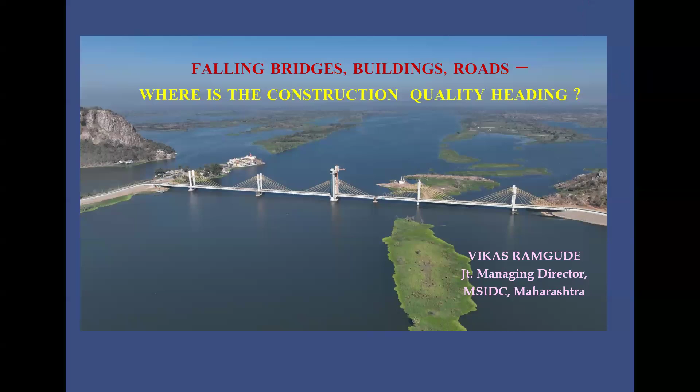Here you can see we have very marvelous structures. Even in the past we have the Taj Mahal and so many beautiful bridges, which have survived for 200, 250 years. The basic difference between today's era and old structures is that most old structures were in masonry or concrete, mostly using the arch form for construction. Environmental pollution was less, so there were lesser durability issues. Traffic was less, axle loads were less, and because of compression there was no cracking, resulting in higher durability. So today people say those bridges have survived for 300 years or more.

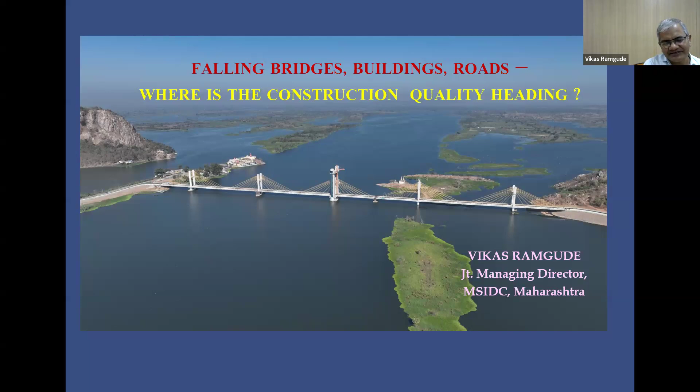What has happened to modern era bridges? Today everything is total hurry - what should be done tomorrow is done today, and what was meant for the day after is rushed into today. That was the speed, and during the last 10-15 years the speed has enormously increased. Infrastructure projects have also increased, but the competent personnel to handle that increased workload has not increased in proportion. That is one of the issues, and it's a very common thing.

Yours is a quality forum, so quality is the ability to fulfill the function. What Ruskin said in a right way is that quality is never an accident - it is always the result of high intention. So there must be will, there must be sincere efforts, and there must be intelligent direction.

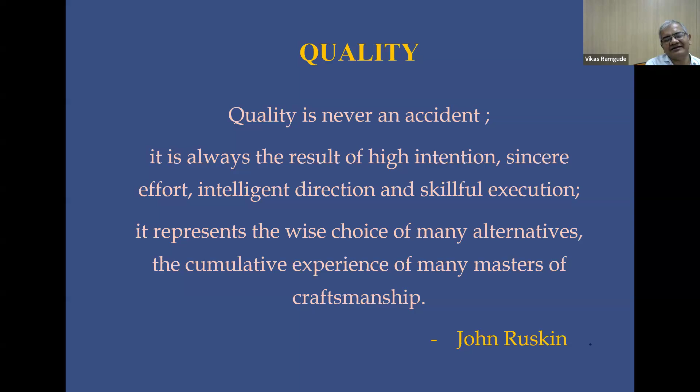And again, skillful execution - there is a supervisory part and there is the actual execution part. There is planning, supervisory design, but the literally skillful part comes from skilled laborers. That is again missing in today's scenario. Ruskin further said it represents the wise choice of many alternatives and the cumulative experience of many masters of craftsmanship. So here he defines the necessity of good builder, good material, good machineries, good intention, good training, and skills, guided by experienced personnel.

I am showing this picture of a bridge in Maharashtra which has completed more than 450 years. It's a single lane bridge, and still it is sustaining the traffic. It has just been repaired nearly 2 times, but not strengthened - only because of the compression form, lime mortar, and light traffic, it survived for more than 450 years.

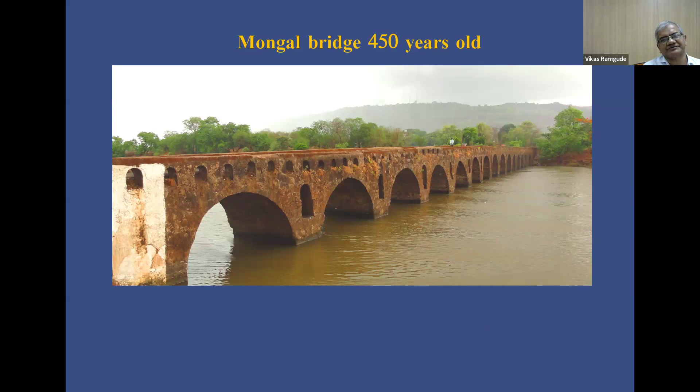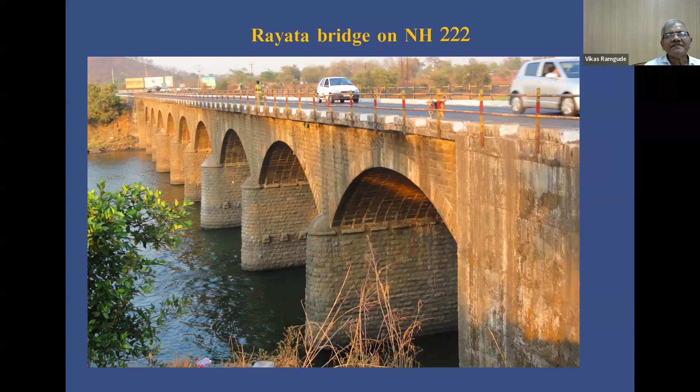The basic challenges we are seeing in government departments are the rapid pace of infrastructure development, ignoring quality and other aspects. Basically these are two parts: the rapid pace of development of infrastructure, and quality being ignored just because of non-availability of that much quantum of experienced and skillful executors, even designers and administrators, because the quantum has increased to a very large extent.

Second is quality of material. When RMC was invented, people were saying that now civil engineering materials are factory controlled materials. For steel, yes, BIS standards are definitely being satisfied. But sand is a natural material, even coarse aggregate - we are not sure about the basic gradation, and we are not sure about the basic methodologies. Whatever comes from the RMC, we have to accept.

Many times the quality of concrete, the most widely used material, has problems at the manufacturing site. Again, transportation, placement, compaction, curing, centering and forms - they all have problems because though infrastructure has increased to this quantum, the development of skillful executors is again a lacuna. Then execution methodology - it's like mixed mode traffic, we have modern plants alongside very rude and crude methodology and equipment. This is the vast spectrum, and we don't have experienced executors, even laborers and supervisors who can cope up with modern methodologies and equipment.

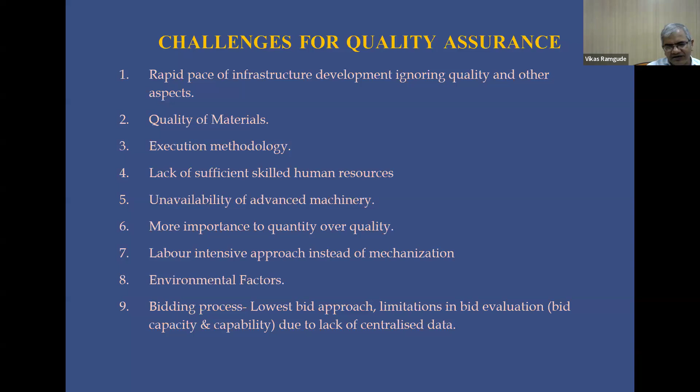These contractors work with different organizations and departments, so centralized data is not available. Because of that, contractors or bidders accept more work than their capacity, and the first problem again is with quality, because their personnel, equipment and management have to cater to more than their capacity. So what are the basic things affecting quality?

At planning stage - inadequate or no investigations. For geotechnical and other investigation, normally it is 2 to 3% of cost, but people are normally avoiding this to save cost. This is a false economy, but they try for that.

Many bridges, many buildings - foundation failures or hydraulic failures of bridges are due to inadequate or no investigation. Many times they see the exposed rock and say it is suitable for open foundation. But when we go for excavation or rest the bridge foundation at that particular strata, below that foundation we may have loose pockets and there may be further settlement because of that.

If we don't have proper hydraulic data, many high level bridges get submerged and may get washed away.

Inadequate design - we have very fantastic tools, very sophisticated softwares available, but the logic in putting the parameters in the softwares and experienced personnel in the designs are lacking.

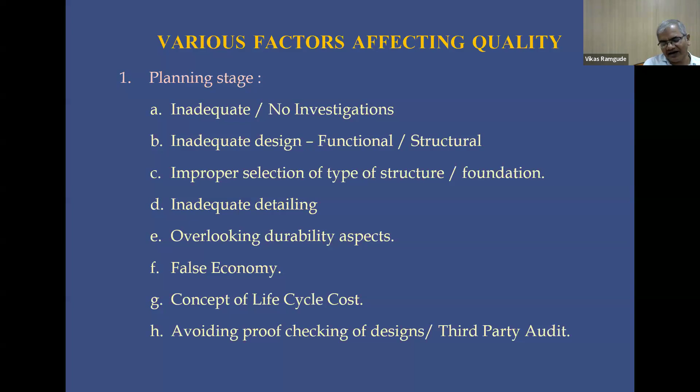So we have 3 minutes more.

During the construction stage, unavailability of skilled human resources causes centering collapses. Many structures like bridges are collapsing because of foundation failure and durability issues, and the major issue is construction failure - modern equipment or launching girders, operations not done as per requirement, lack of training and testing facilities, inadequate implementation of quality assurance manuals and documents, negligence in safety measures, improper construction methodology. Basic major failures are centering or falsework failures.

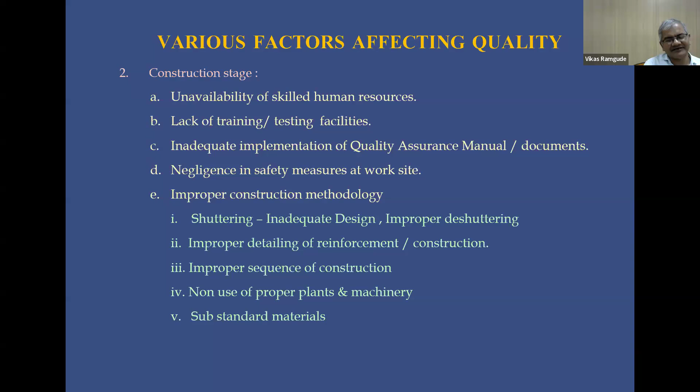Improper detailing is again a major issue causing failures. Improper sequence of construction, again just like that Bihar issue. Non-use of proper plants and machinery, and substandard material.

During service life - and this is most important as Mahajan sir stressed - excessive loading beyond design loading because of improper implementation of transportation rules and regulations, settlement of foundation, improper detailing - again an issue that is okay on paper or in the design drawing but not implemented in actual execution because of unavailability of skilled personnel to interpret the design, and inadequate maintenance and availability of funds.

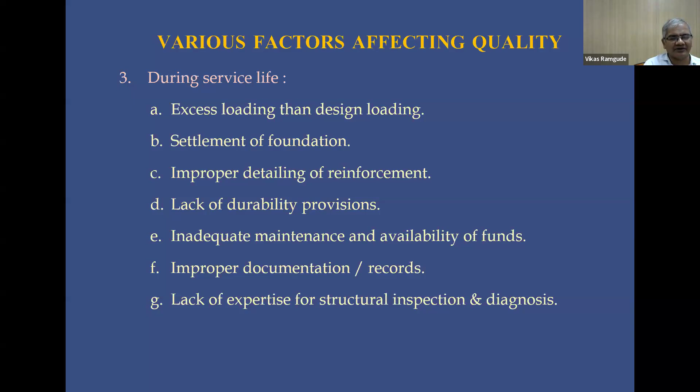These are two different issues but they may come together. Improper documentation and records - once the building or bridge is constructed, records are not maintained, and for further repairing those records are not available. There is also a lack of expertise for structural inspection and diagnosis, which is again an issue.

One can see these are very fantastic modern bridges at the time of construction or just after construction, but maintenance is the main issue.

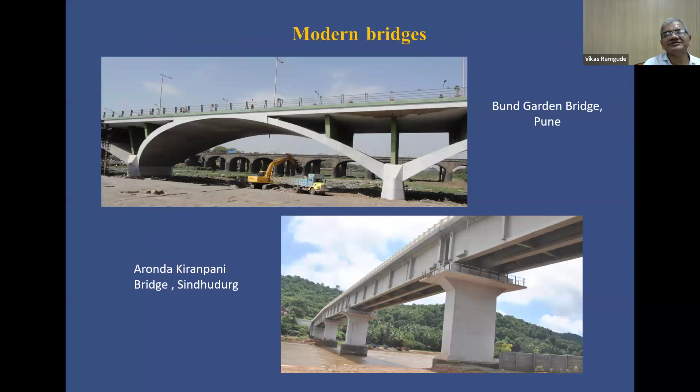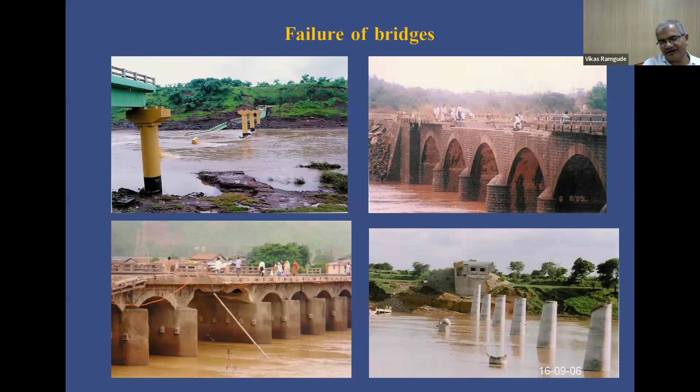Flood damages of bridges - in the first figure it is because of wrong hydraulics. In the second bridge, again wrong detailing. Third, foundation settlement. And in the fourth, a high level bridge gets overtopped and becomes a submersible bridge, and the bridge is not in a position to survive.

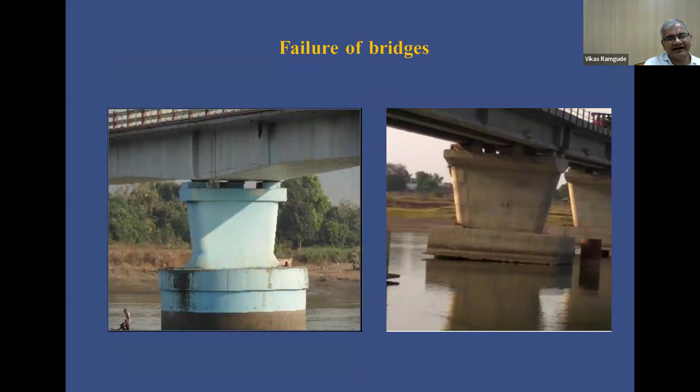Again, due to ill maintenance, there is settlement of the foundation on the right hand side, and again on the left hand side there is settlement, and the bearing and superstructure get damaged because of this. Again, in prestressed concrete, the cable breaks because of improper maintenance, and the entire superstructure fails.

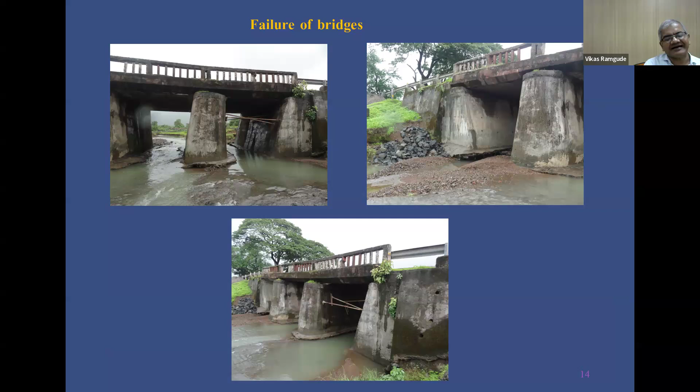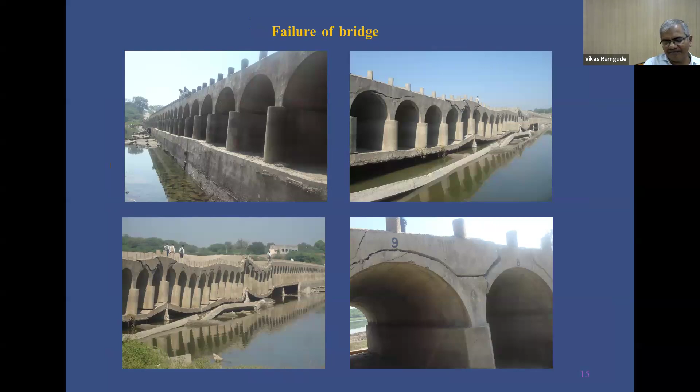Again, here the foundation strata was not identified perfectly. The foundation rested on silt level strata, so there was differential settlement of the pier. Again, here there is sand mining - this was a raft foundation resting on soft strata, and the foundation was taken 2.5 meters below the bed level, but there was excavation or mining of sand more than 3 meters, and because of that the bridge fell due to settlement and other issues.

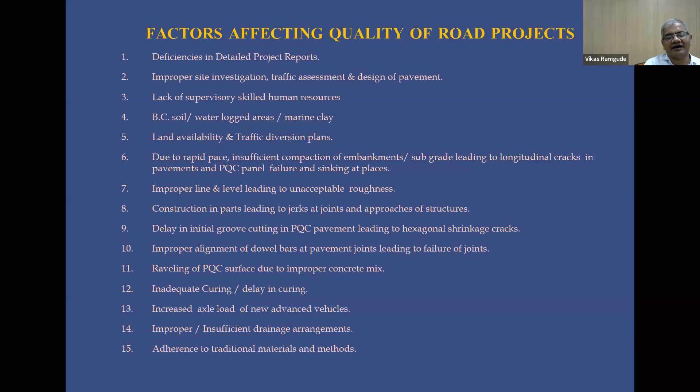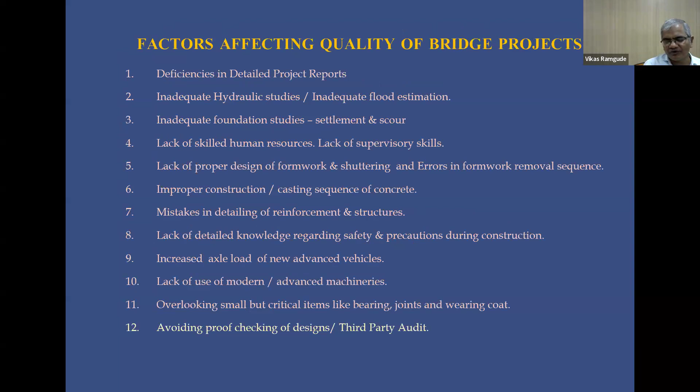So, factors affecting the quality of road projects. There are nearly the same components, but environmental factors and traffic diversion are major issues here. In building projects, the common factors are similar, but additional factors include excavating in congested areas or near existing structures, where you have to take protective measures. In Pune or Bombay, there are cases where excavation for a new building or project caused older buildings to give way, resulting in casualties. The same applies to road and building projects.

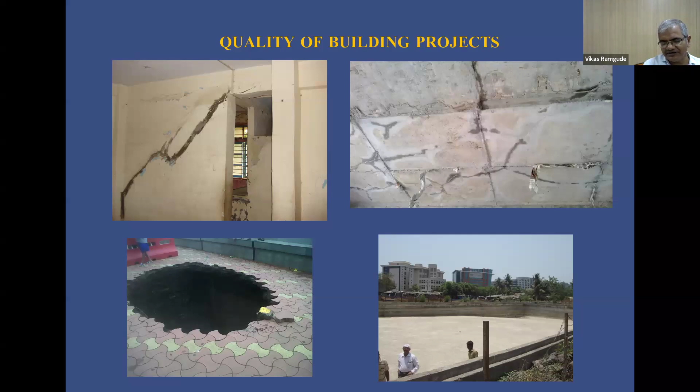Improper maintenance is another issue. You can see a coastal structure which was not protected properly. On the bottom left, there is scouring and improper compaction, and basically a swimming tank which was not designed properly. When it was empty and there was rainfall, because of groundwater pressure, it caused the bottom slab to fail. These are the things basically.

So structural, functional, geotechnical investigation, and regulatory aspects are very important. To improve this, we have to start with what is available. We have to do something with it, and we should never be satisfied with our quality standards. We have to improvise. We have to go for precast construction. We have to mechanize more and more, and we have to invest in investigations. We have to train the people and make them aware of quality. These are the key issues.

My presentation is regarding standards for safety in construction. Just one minute - I think we have limited time. No, actually I'll finish, Ramaji, you can say. I'll finish that in 10 minutes, don't worry. Fine, because everybody is aware about this, only some important things I have to talk, I won't talk much. We have 15 minutes, we can continue.

This was supposed to be delivered by BIS people, and only yesterday night Mr. Johari told me - I was not prepared for that, so I prepared in a hurry. But I'll speak on some important things which we have been facing in BIS and elsewhere.

When we talk about building and infrastructure development, the stages are: planning first, selection of material and construction system, selection of construction agency. Then you initiate construction - earthwork, then foundation, plinth, then superstructure. At that time, material availability, material quality, laying and fixing become very important.

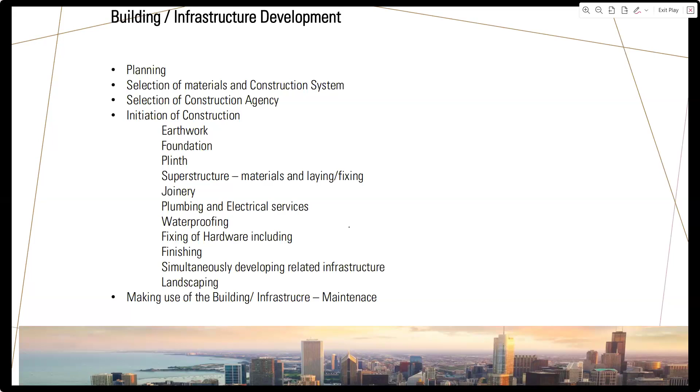So in all these aspects, what is the best way? Best way is to follow some standards. And you all know Bureau of Indian Standards plays a pivotal role in establishing specification of code of practice guidelines for construction material, practices, related subjects through different technical committees to achieve this objective. We have been a part of this, both

Neeta, myself, and others have worked extensively in this area, and we have drafted many standards. So skipping this, Bureau of Indian Standards, everybody knows, their key function is to develop standards and then promote it, and through ISI mark quality control is also done to promote sustainability, durability, and safety, including for emerging construction technologies which are now coming up.

So why we should follow standards? Standards, when formulated, are through a technical committee represented by many sectors. Technical people are there, consumers are there, important organizations are represented, experts are there, and through different stages - preliminary stage, wide circulation stage, and others - a fair amount of acceptance is already there when you have a standard. So even CPWD manual, if you see, if there is an Indian standard, they straight away follow it.

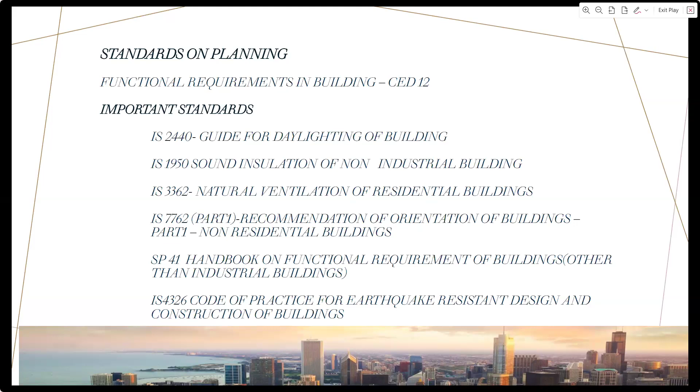And then when you plan for earthquake type of disaster, there is a code, IS 4326, which guides you what type of structure should be there, whether it should be H type or not, like this. And there are many other aspects also covered at the time of planning in an earthquake prone area.

Now, once you plan it, then comes design. The design part - what do you need? Loading code is there, IS 875 part 1 to part 2, 3, 4, 5 - that is imposed loads, wind loads, special loads and load combination. IS 1893 part 1, criteria for earthquake resistant construction, gives requirements of earthquake forces. These are all important for design.

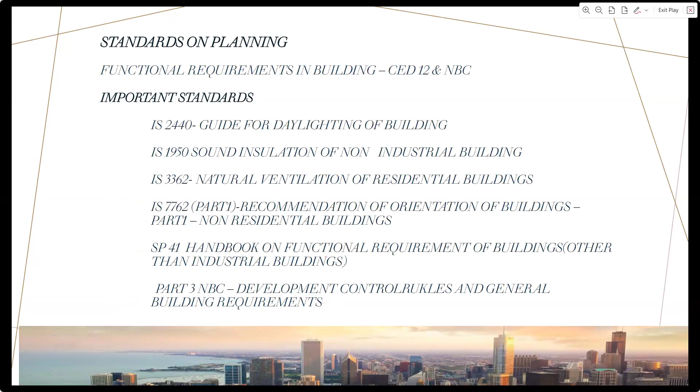Then once design is done, you select material, whether it is concrete or steel or timber. If it is concrete, IS 456 code of practice for plain and reinforced concrete is there. If it is steel, IS 800 code of practice for general construction in steel is there. For timber, IS 883 is there, even for that.

All these are also covered in National Building Code, but I feel individual standards undergo revision in quick succession, so it's always better to follow that. Then earthquake resistant structure, IS 1893, is required for earthquake resistant design.

Structural safety, then fire safety. Fire safety is fully covered in Part 4 of the National Building Code, and most bylaws follow Part 4 of the National Building Code. Recently, BIS has also published criteria for structural safety of tall buildings, since earlier provisions were not applicable to tall buildings.

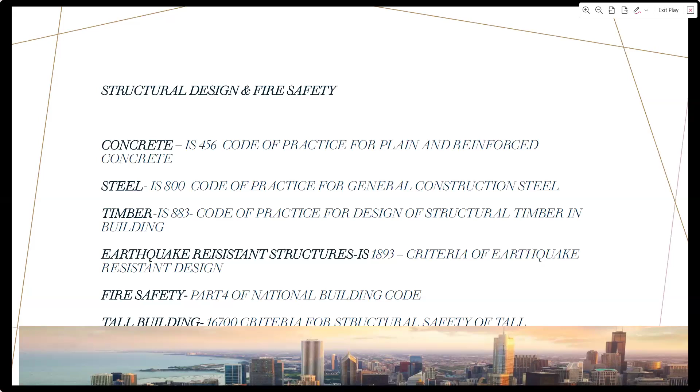Once the design is done, you start construction, and the first thing that comes is material quality. Cement, concrete, and steel are important - these are basic materials required even for prefabricated construction or in-situ construction.

The cement standards are there - IS 269 for ordinary Portland cement, covering 33, 43, 53 grades. IS 1489 is for Pozzolana cement. Then quality parameters are fixed for supplementary cementitious materials, also called mineral admixtures, which are now extensively used for concrete making.

IS 3812 part 1 covers pulverized fuel ash cement used for pozzolana cement and mortar concrete. Silica fume, used for high strength concrete required for bridges or infrastructure, is covered under IS 15338.

Then most recently, GGBS - ground granulated blast furnace slag - is very much in use in concrete by ready mix concrete and other concrete technologists. IS 16714 is a very new standard covering that, and ultra-fine ground granulated blast furnace slag is also covered.

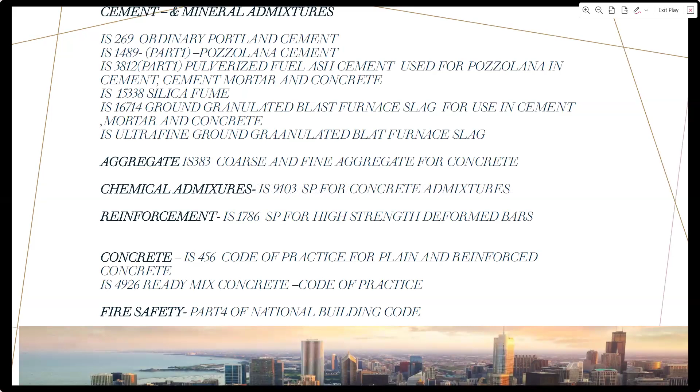Fine sand is almost non-available in most parts now. In Tamil Nadu, only manufactured sand is available. If quality is not maintained, your concrete quality will not be maintained. So IS 383 now covers how much percentage can be used and under what circumstances.

Other than that you need chemical admixtures, which are covered in IS 9103. And then another important element in RCC is reinforcement.

Different types of reinforcements are in the market, all covered in IS 1786 - 500, 550 grade, with ductility more than 14%. And concrete as such is covered through IS 456 and IS 4926, which is the code of practice for ready mix concrete.

And as I earlier told, fire safety is Part 4 of the National Building Code.

Then IS 2185 part 4 is for cellular concrete blocks, and part 3 is for autoclaved cellular concrete blocks. Autoclaved AAC blocks are now used in Delhi - if you see the construction, multi-story construction, most builders are using these AAC blocks.

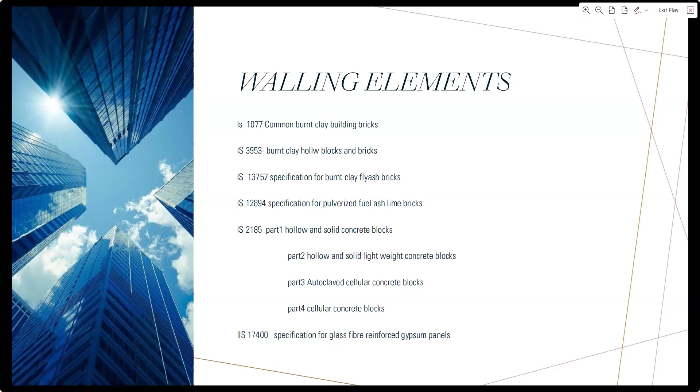A number of standards are there. One can always see these standards from the program of work of the Civil Engineering Department of the Bureau.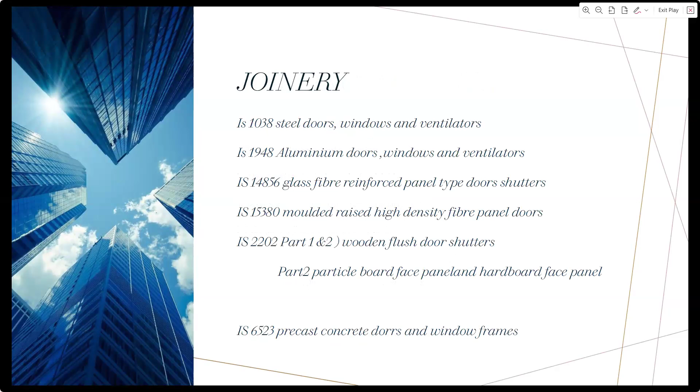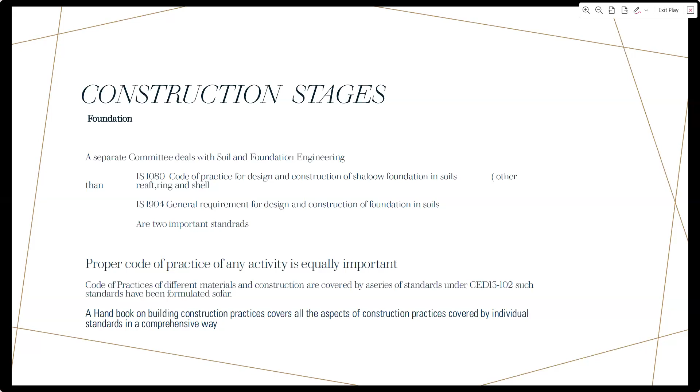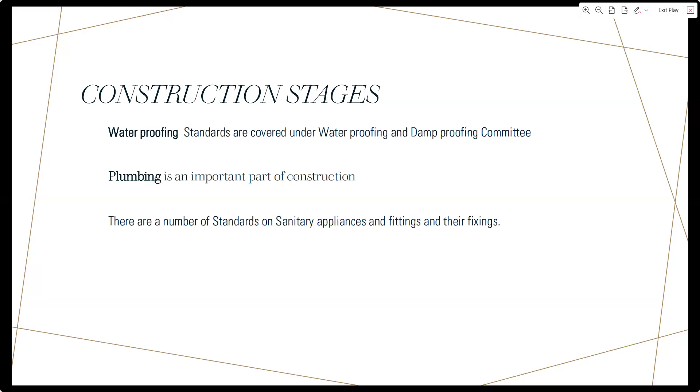Then you have waterproofing, which is important. Most building structures fail due to leakage and dampness, so waterproofing standards are covered through a committee on waterproofing and damp proofing. Plumbing is, I consider, the most important part of construction - if not done properly, the person living below your floor suffers most. So plumbing is covered by many standards, and there are a number of standards on sanitary appliances, fittings and their fixing. One should use all this.

During construction you need construction management, and a series of standards have been formulated by CED 29 of BIS, covering different aspects of construction material, budget, planning and other things. Then you have the National Building Code, which takes all these things into one book, and in different chapters all these are covered. All individual standards which are important are covered in a systematic manner.

Chapter 11, approach to sustainability, is very extensively written by many experts and is required to be used not only for safety but sustainability, which we have to deal with now. It also talks about an integrated approach by a multidisciplinary team comprising different professionals - architects, civil engineers, plumbing engineers, geotechnical, and all. Big projects should have all multidisciplinary teams to work with.

Now these are some of the standards which I thought are important from a construction point of view, but there are about 1,700 standards published, and still many new materials and new technologies are required to be covered which are still not there.

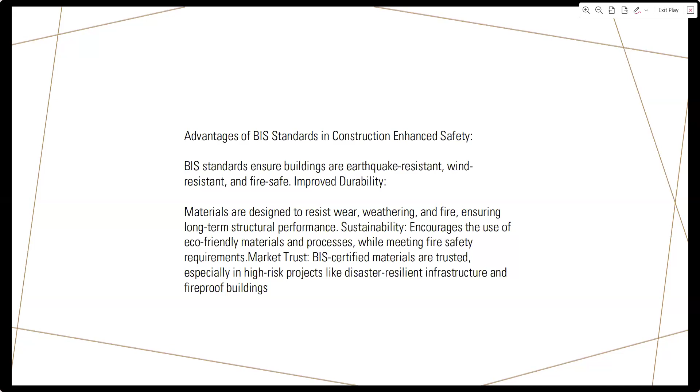Then there is market trust - I'm not sure how much everybody will agree, but BIS has a certification mark scheme where ISI mark products are there, and the scheme is such that if it is followed in the right spirit, quality will be maintained in the factory.

But we have challenges. How to implement these standards - that is a problem, especially in remote areas, ensuring that standards are applied. Particularly for new technologies, there is nobody to guide.

Then there is an awareness gap. Although BIS is making all efforts to popularize standards, there is still not enough awareness about safety, earthquake resilient structures, especially new construction methods like prefab and monolithic construction. Monolithic construction is okay, it has some design criteria fixed now.

So what is required to be done by the Bureau is that new technologies which are coming up should be covered through technical committees suitably. The National Building Code has some provision - when I was working with BMTPC, we had developed a performance appraisal certification scheme for new material and technology.